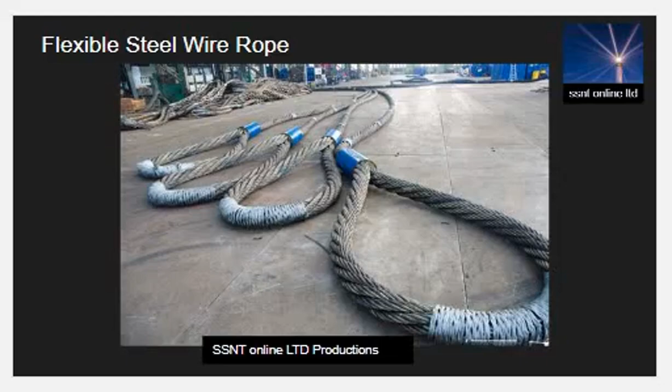Let us start with a look at slings made of flexible steel wire rope. The safe working load of a sling is the maximum load that may be lifted after considering the safe working load of the sling material, the reeving arrangement, and the method of sling termination. The loading factor of a flexible steel wire rope is a combination of reeving factor and angle factor.

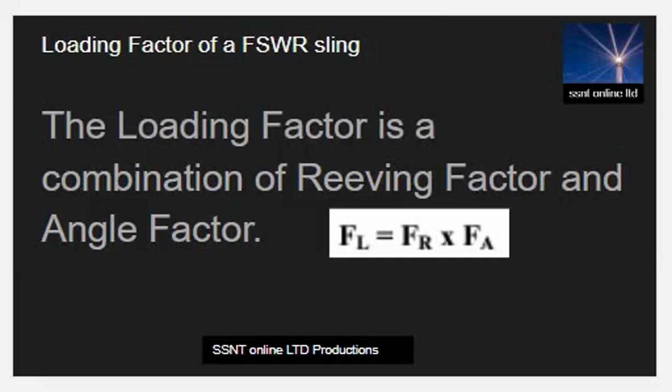Let us now look at some hitches for single slings. This is a single sling direct load. One end of the sling is on the crane hook, while the other end is attached directly to the load. A tagline is used to prevent load rotation. The loading factor is 1 multiplied by the safe working load of the sling material.

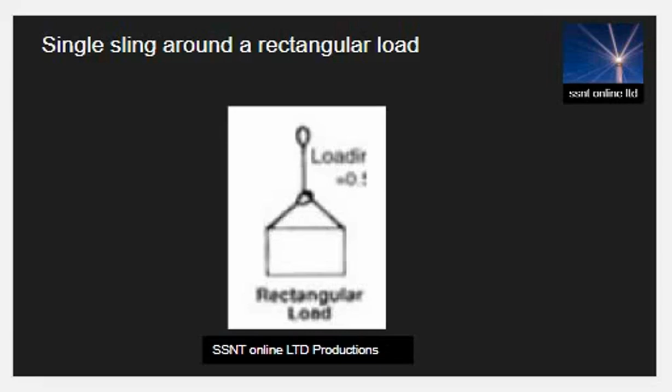This is a single sling reeved around a rectangular load. One end of the sling is passed around the load, then up through the other end and placed on the hook. Load control is limited with only one sling rigged in a choker hitch. A choker hitch will never provide full 360-degree contact. The loading factor is 0.5 multiplied by the safe working load of the sling material. The choke point should always be on the sling body, not on the sling eye, fitting, base of the eye or fitting, splice or tag.

This is a single sling reeved around a round load using a choker hold. The loading factor is 0.75 multiplied by the safe working load of the sling material.

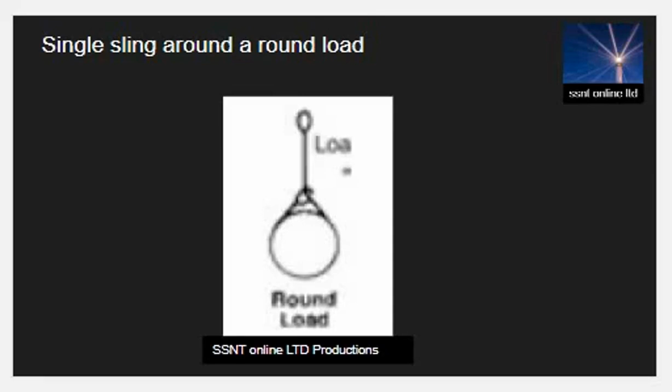This is a single sling reeved around a round load using a choker hold. This slinging method does not grip the load completely and should be used only when the loads are easily stabilized or cannot slip out of the sling.

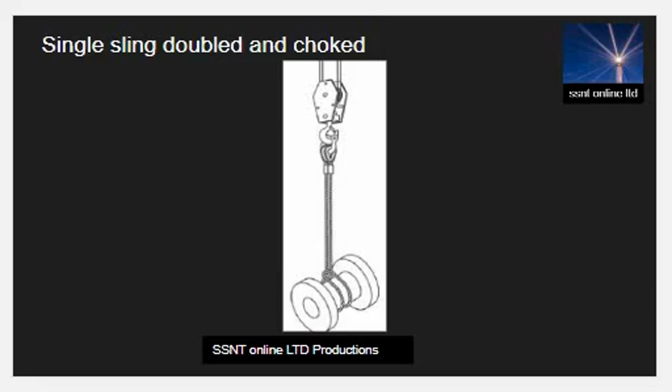The double choker hitch, if applied properly, will facilitate equalization of the loading on the sling legs over the lifting hardware. If applied improperly, one of the legs will share a greater portion of the load and equalization will not occur. The double choker hitch workload limit is twice the regular choker hitch workload limit.

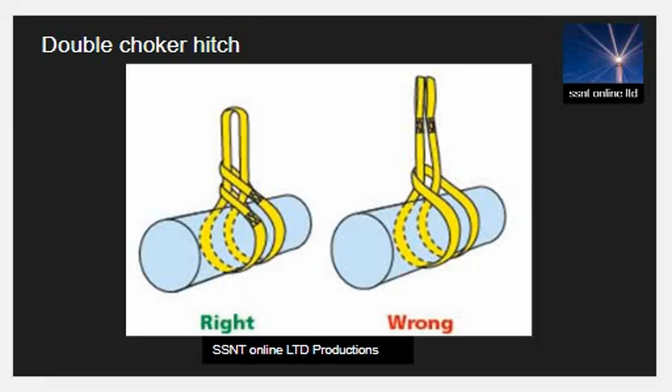On the left is a basket hitch around a round load with a load factor of 2. On the right is a basket hitch around a rectangular load with a load factor of 1. The sling cradles the load while both eyes are attached overhead.

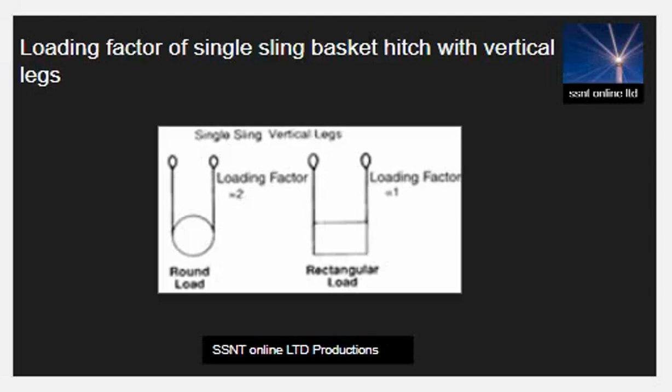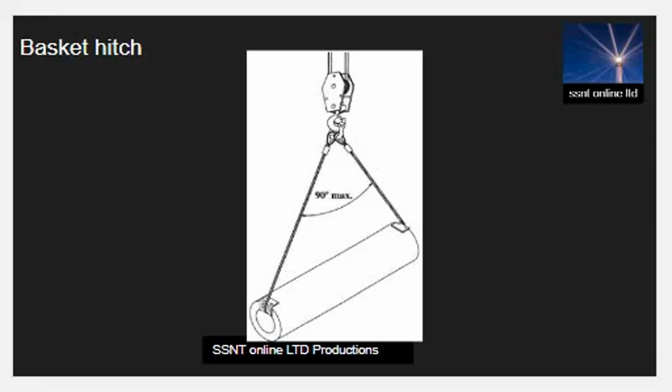As with the choker hitch, more than one sling may be necessary to help ensure load control. A basket hitch should only be used when the sling is passed through part of the load and the load is balanced on the sling. The lifting should not commence until a shackle is connected to the sling legs. The included angle of the sling should not exceed 90 degrees.

If the angle between the sling legs around a round load is 90 degrees, then the loading factor of the sling is the safe working load multiplied by 1.41. If the angle is 120 degrees, then the loading factor is the safe working load multiplied by 1.

For rectangular loads with the basket hitch and angled legs, if the angle between the sling legs is 30 degrees, then the loading factor of the sling is the safe working load multiplied by 0.97. If the angle is 60 degrees, then the loading factor is the safe working load multiplied by 0.87.

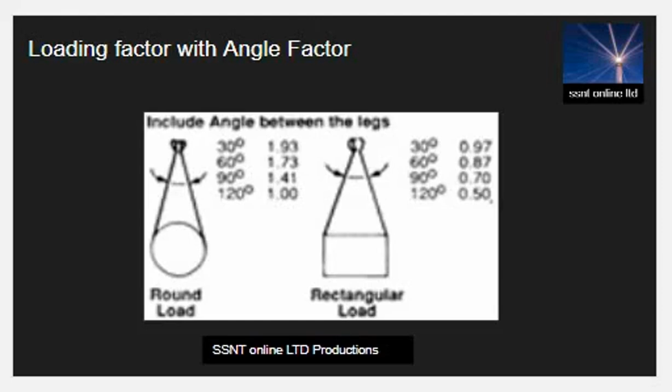If the angle between the sling legs around a rectangular load is 90 degrees, then the loading factor of the sling is the safe working load multiplied by 0.7. If the angle is 120 degrees, then the loading factor is the safe working load multiplied by 0.5.

When using multi-leg slings, we should ensure that the slings are of the same length. Where the slings have different safe working load ratings, then the load that can be lifted is related to the least safe working load, and the attachment points of a two-leg sling to the load are far enough apart to give stability without exceeding 90 degrees.

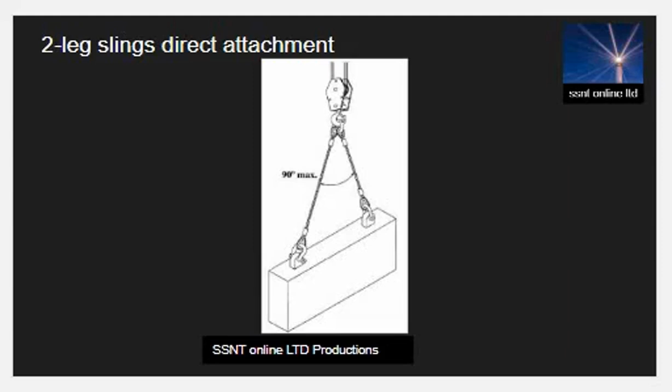The two-leg slings used in choker hitch, basket hitch, double wrap choker hitch and double wrap basket hitch should not be used for handling composite loads such as loose bundles of tubes, bars, or wooden battens unless the friction grip between the parts is sufficient to prevent them slipping from the sling. As far as possible, such composite loads should first be tied up securely at their ends by steel wires or similar means of adequate strength.

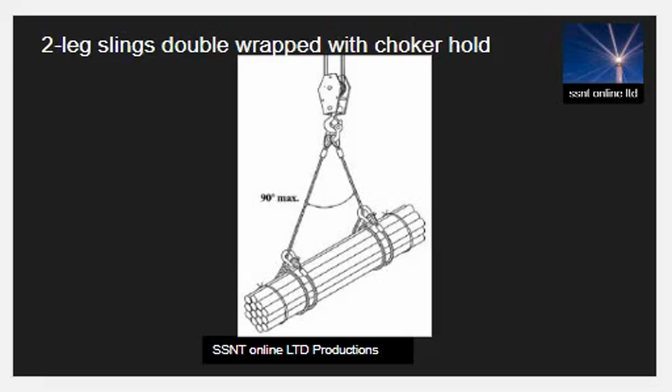Consider the angle between the legs of the slings. For example, the weight of the load to be lifted is 20 tons, and the angle between the legs of a two-legged sling is 60 degrees. This means the load factor is 1.73 for the angle. The weight is 20 tons, and the angle factor for 60 degrees is 1.73. Therefore, the safe working load of the wire should exceed 20 divided by 1.73, or 11.56 tons. Use a sling with a lifting capacity greater than 11.56 tons.

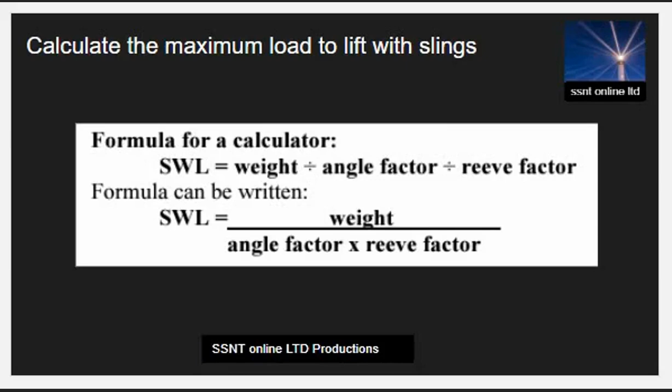Let us consider the reeve factor as well as the angle between the legs of the slings. To calculate the maximum weight of load that can be lifted, multiply the SWL of the sling, or slings, by the angle factor and by the reeve factor. The SWL of each leg of a two-legged sling is 8 tons, the angle factor for the 60 degrees between the two sling legs is 1.73, and they are reeved around a square load having a reeve factor of 0.5. The maximum weight that can be lifted is equal to 8 times 1.73 times 0.5, or 6.92 tons.

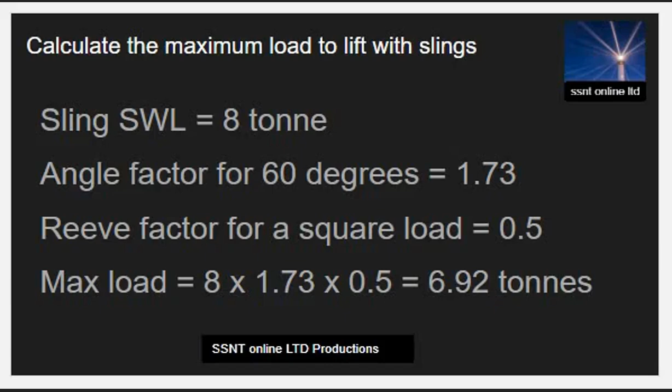The location of the lifting points and the length of slings used relate directly to the angles involved. Choose wisely.

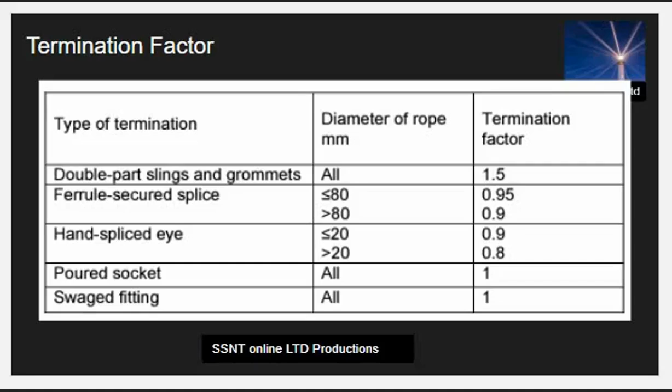Sling termination factors depend upon the type of termination and rope size. This table provides termination factors for commonly used termination methods. To simplify selection of the appropriate wire rope sling, it is usual to combine the safe working load of the rope material with the loading factor to produce a safe working load chart. This load chart is for 6 by 24, 1570 grade, galvanized steel wire rope. The safe working load for various rope sizes and slinging configurations has been combined to enable the safe working load to be taken directly from the chart. The only correction which may need to be made to values taken from the chart will depend upon the method used to terminate the sling.

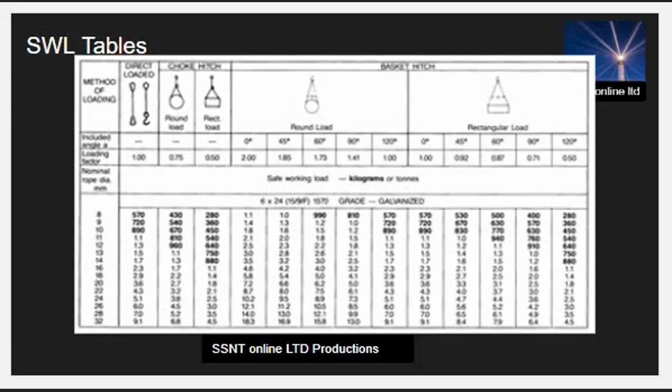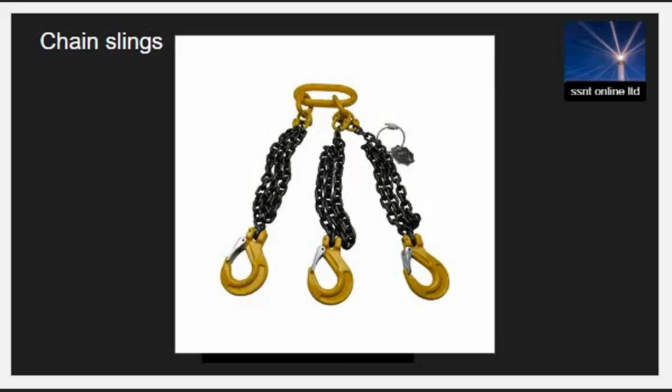Chain is considerably heavier than wire rope of the same lifting capacity, but is more durable. It can better withstand rough handling and can be stored without deterioration. Always check that the grade on the tag matches the grade markings on the chain. Do not use if there is no tag on the chain. Chain slings are often used for lifting heavy items on work sites, such as skip bins, concrete slabs, and pipes. Chain slings are made up of lengths of high tensile chain, with a variety of fittings attached.

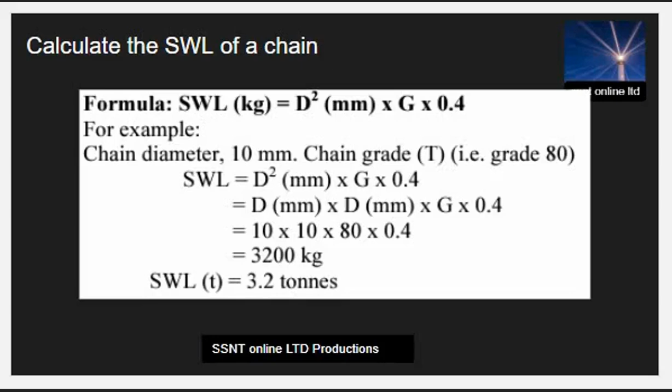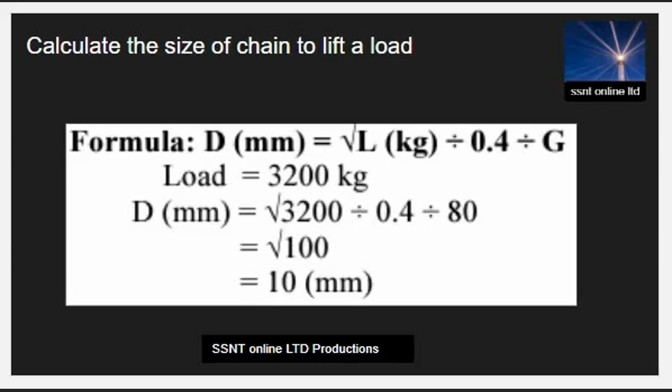To calculate the safe working load of lifting chain in kilograms, multiply the diameter, in millimeters, squared, by the grade, by either 0.3 or 0.4. For grade 80 chain, use 0.4, and for grade 30 or 40 chain, use 0.3. To calculate the diameter, in millimeters, of chain needed to lift a given load, divide the load, in kilograms, by 0.4, and by the grade, and find the square root of the result.

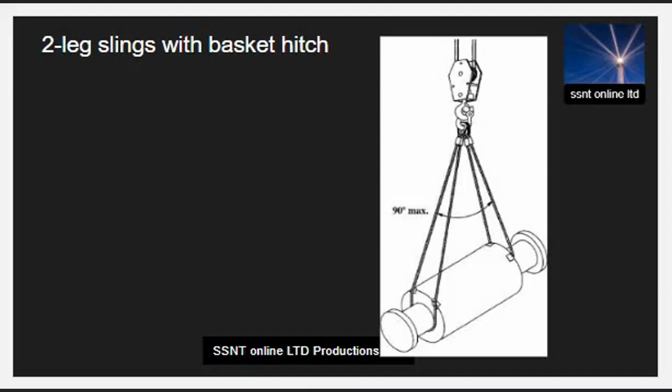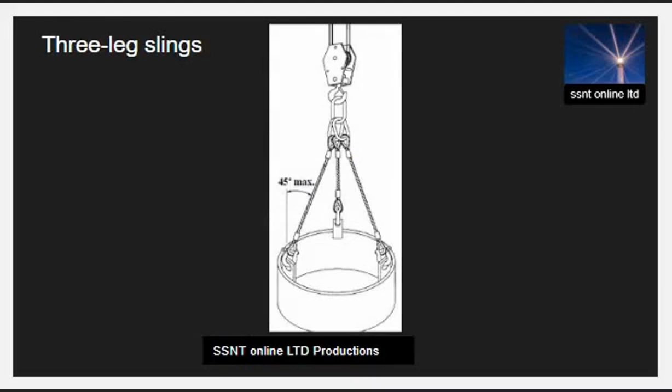In the case of a two-leg sling used in basket hitch or a four-leg sling, the angle between any two diagonally opposite legs should not exceed 90 degrees unless the sling is so marked. In no circumstances should the included angle exceed 120 degrees. Spreader beams, spreader bars, or lifting spreaders are a long bar that keeps two slings apart from the lifting distance. It is designed with two lifting eyes at the top of the beam. For a three-leg sling, any one leg should make an angle of not greater than 45 degrees with the vertical. For a four-leg sling, any one leg should make an angle of not greater than 60 degrees with the vertical.

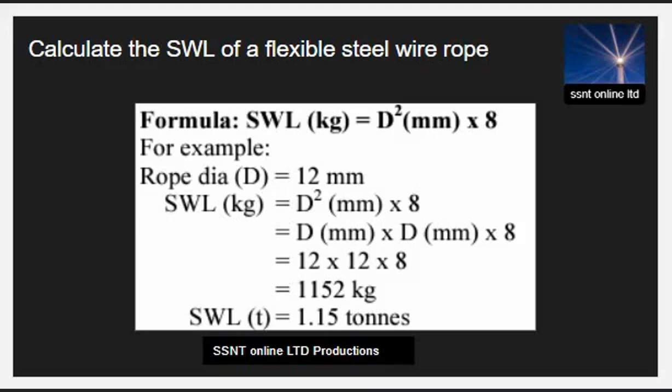The safe working load of slings depends on the safe working load of the sling material, the reeving arrangement, and the method of sling termination. The safe working load of a flexible steel wire rope, in kilograms, is the rope's diameter in millimeters, squared, multiplied by 8. If a wire rope has diameter 12 millimeters, its safe working load in kilograms is 12 squared, multiplied by 8. That is 144 multiplied by 8, or 1,152 kilograms, or 1.15 tons.

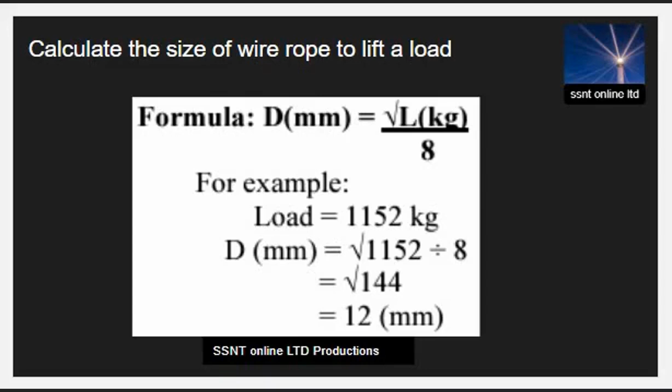If we have to determine the size, or diameter, of wire in millimeters to lift a known weight, we divide the weight in kilograms by 8, and find the square root of the result. If we had to determine the size, or diameter, of wire to lift 1152 kilograms, we divide 1152 by 8, and find the square root of 144.

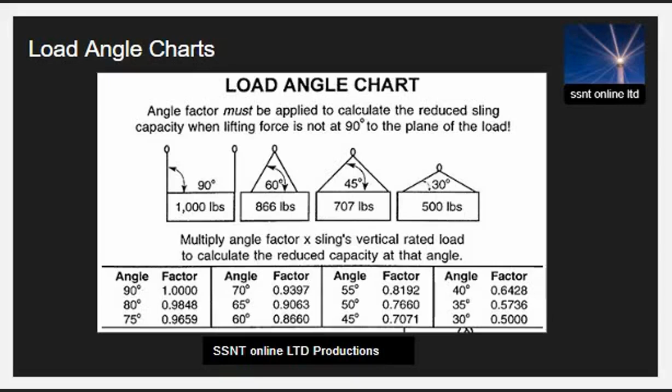Let's look at determining the maximum load that can be lifted. This chart shows how the safe working load of the same wire changes when the angle between the legs changes. We start on the left with the legs vertical, or 90 degrees, we can lift 1,000 pounds. The load factor for 90 degrees is 1. Then second from the left, the angle between the legs is 60 degrees, and we can lift 866 pounds with the same wire. The load factor for 60 degrees is 0.866. Second from the right, the angle between the legs is 90 degrees, and we can lift 707 pounds with the same wire. The load factor for 90 degrees is 0.707. On the right, the angle between the legs is 120 degrees, and we can lift 500 pounds with the same wire. The load factor for 120 degrees is 0.5.